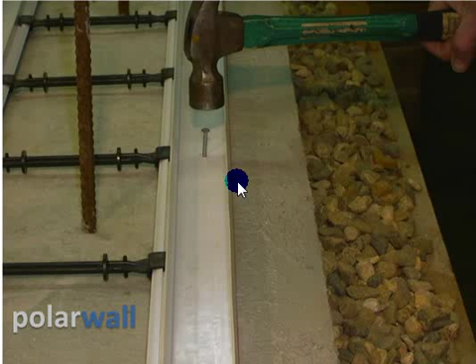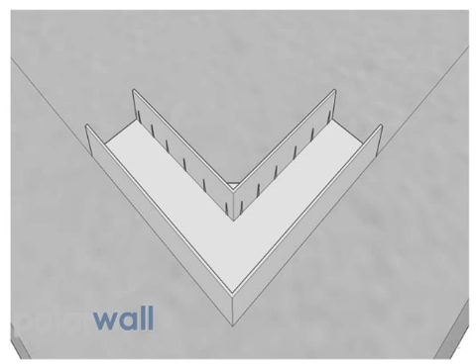This is the second part of the quick flick through of the Polarwall installation method, and we'll start off with the U corner. This is how it all begins. We put the U corner down. This is an imaginary chalk line here shown on the outside. So we set our chalk lines out, we put the U corner down, and we put this on the outside. It's the outside U corner, and this would go down.

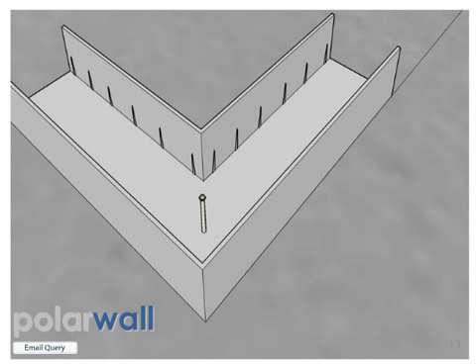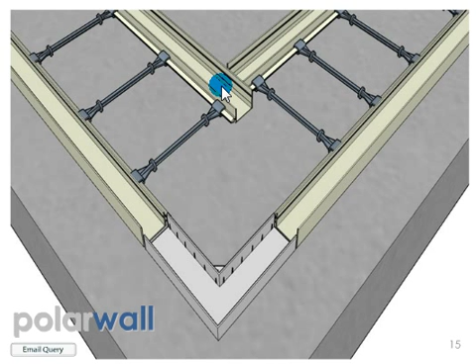It would be fastened down either by a nail, screw perhaps, or even shot fired into the concrete slab or into the concrete footing. Once we've got all our corners in, then we start to put the U-track down. Now you'll notice here that we don't actually use a U-corner on the inside, but instead we put two U-rails up to each other. That just needs a little bit of a trim on the end with a handsaw or a hacksaw.

And once we've got our U-track down all the way around, one thing I have to point out here: notice there between the corner and the rail, and always between the rails, we're leaving a small gap, and the gap is, let's say, a little finger width, 10 millimeters, something like that. That's fine. And when we fasten the track down, all it requires is a concrete nail, a screw again, shot fired perhaps, and it actually requires only one fastening here to the centre of the outside rail.

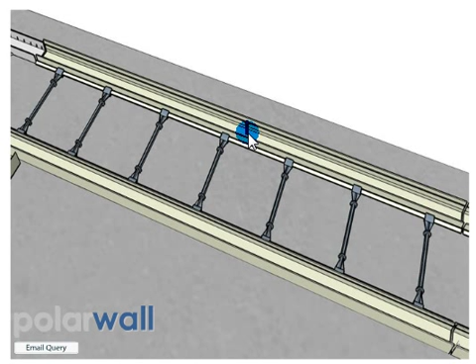I do turn up on site and find there'll be 5 screws on this side and 4 on this side, whatever. It's not really required. Just one is sufficient on the outer rail in the centre. Again, you'll notice the gap there between the rails, small gap left between the rails, and that's showing the gap in a little bit more detail. It allows movement of the formwork, allows some expansion as well in hot weather.

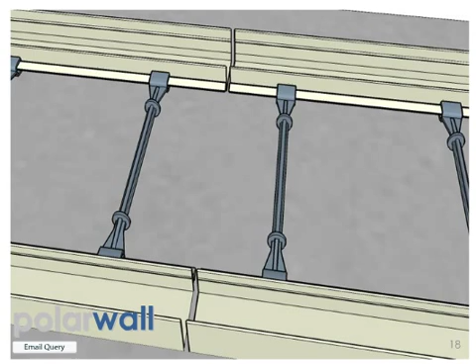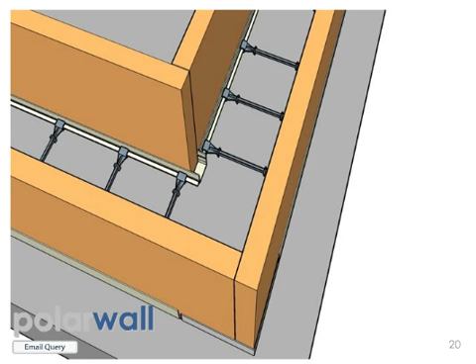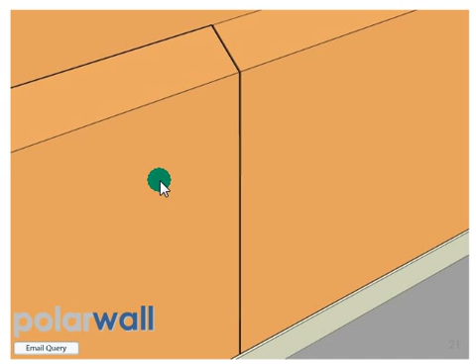When the boards go together, we butt them up to each other. Don't keep pushing and making it tighter and tighter. There is some movement required in the formwork as it's all being assembled, and all that will happen here is that the material will start to compress, and although we are using extruded polystyrene, which has a very high compressive strength, you'll put this into some compression, and the material memory will then push back afterwards, and it'll push the corners out of square, which is very undesirable and not what we want at all.

You'll notice that as it goes on, we start to put the H track on next once we've got all the boards in position. Again, building from the corners in towards the centre. Here you'll see a little squeeze at the top of the H rail opens it up at the bottom. He's using an individual rail there, but normally we put them on in ladders. And here's a ladder that goes into the corner. Now you'll see that we've cut off part of one side of the rail here. This is the inner part of the rail, and that's where our internal H corner is going to go.

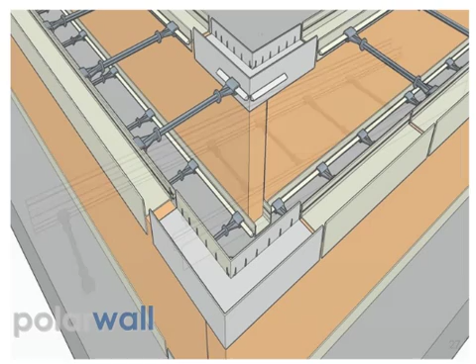And on the next picture you'll see here this here and here. This is the rail that we've just looked at, and that's the internal corner there, and the piece that we cut off that would have fitted in just here has now been put here, and that aligns the end of the internal corner there with the cut-off piece there. So that means that we can put the next ladder straight in. Obviously what we want to do is alternate at each corner.

The thing to remember in the corners is to make sure that we have a tie across from the outer rail to the inner corner, and we should build this in courses, one course at a time, and as each course goes on, just check that each corner has got that tie on. Not the end of the world if it isn't put on. We can always fit it on at the end. When I go on site to check formwork, I generally find that about 3 courses up there's a tie missing. I just open up the formwork with a little handsaw, put my hand inside, snap a tie on, and it's done. So there it is with the tie.

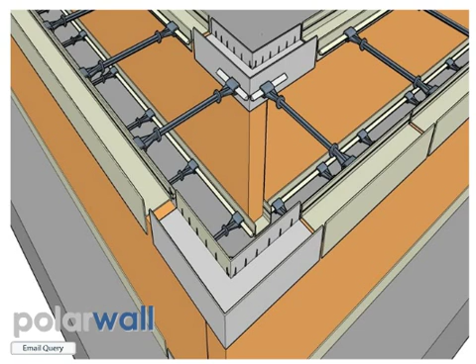That's what the corner should look like, and everybody's surprised once they put these corners on just how rigid this corner is. Here again we're seeing the gap between the H rails, finger width 5 to 10 mil, doesn't have to be measured. And once the first course is down, it's good practice to go around with a lump hammer and a piece of wood, put the wood inside the rail, and give it a tap down. Make sure everything's seated in position properly. And once we've done that, we've got the first course down, everything's ready to go.